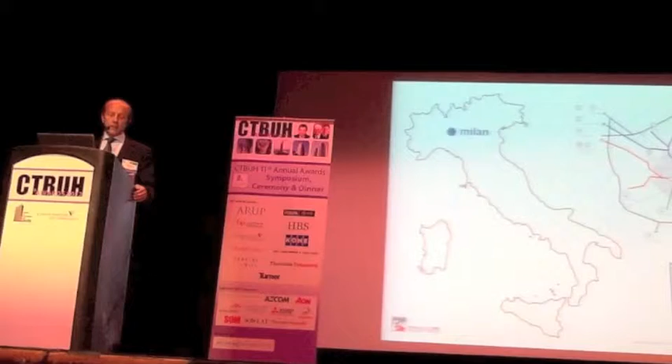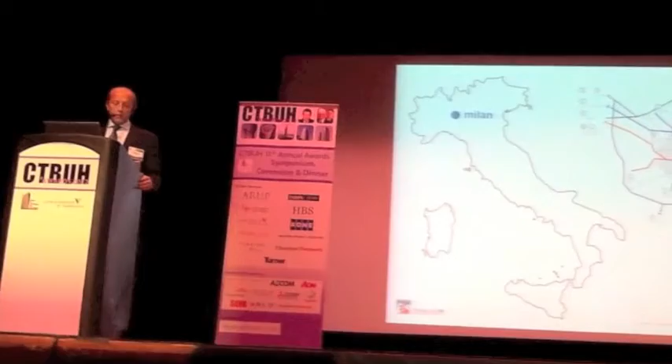The site is in the north part of Milan, heart of an intermodal hub with high accessibility, served not only by the railway network but also by underground lines, metropolitan railways, and several tramways. But these important buildings and the particular system of infrastructure have been a physical fracture in the urban fabric for years.

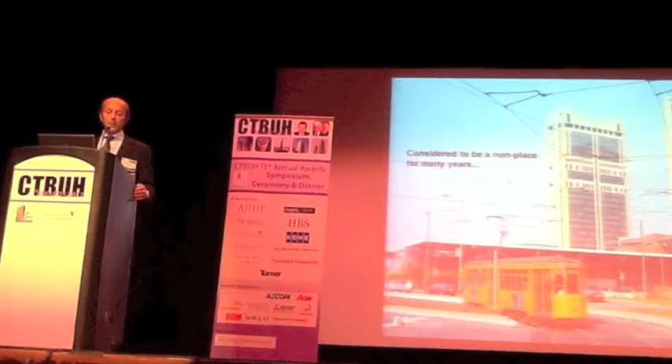Considered to be a 'no man's land', this area of Milan, between Garibaldi and Repubblica, has separated 3 neighborhoods for over 30 years. So when Beni Stabili, our client, decided to buy Garibaldi's Tower in 2004, so many years ago, they wanted to create a complete sustainable restyling of the building.

Aldo Mazzocco, the general manager of Beni Stabili, called me to lead the project, and he said, 'Massimo, I have a dream. I want to offer Milan a gift, a precious gift. I want to leave a mark to improve the skyline of Milan, since we design and build buildings that are people-friendly.'

So I asked him, 'You want to design the first green building in Milan?' And he said, 'Yes, we must do that.'

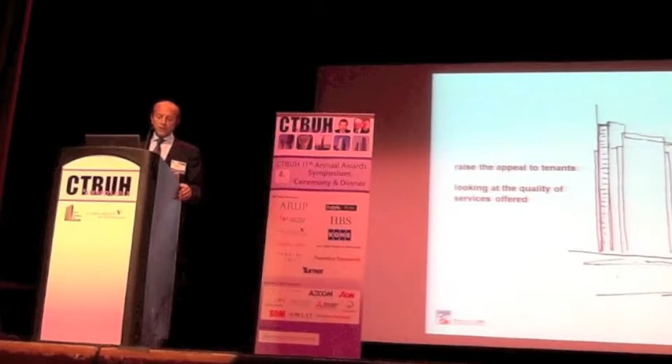Mazzocco, talking about the Garibaldi Tower, said it was necessary to provide a high level of services that would allow us to achieve a double target: to raise the appeal to tenants and to increase property values - a building able to meet their needs, always looking at the quality of services offered to users.

So it was necessary to rethink the building complex through new technological advanced materials and techniques, introducing efficient, flexible, and operationally economical spaces. These actions would propel the towers upward, creating a new symbol for the city - the first one from a green point of view.

The complex is composed of different elements: 2 towers, 22,000 square meters of gross area each.

The design process took about 1 year, from 2007 up to 2008. We developed it inside our company - we are an integrated company, with not only architects, but also engineers and experts on different items. The building development took about 2 years, from 2008 up to 2010.

We call them skyscrapers, but really tall buildings, high-rise buildings - 100 meters to the last operating floor, and then the tip is 122 meters. We can host about 1,200 workstations with people working there.

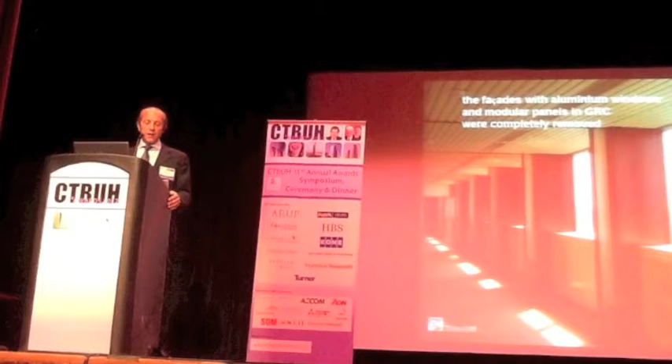The construction operation had been rather delicate because it was an existing complex built on the railways. Internally, it was necessary to dismantle and disassemble all the plants, while the facade with aluminium windows and modular panels in glass fiber reinforced concrete (GRC) were completely removed.

For this reason, dismantlement and disposal required about 120 days, with an average of about 100 workers on site per day. The urban area was very busy and congested by the presence of different sites throughout the Garibaldi area, where there was and still is an intersection of rail, vehicular, and pedestrian flows.

So it was necessary to have accurate and early planning of internal logistics. The building was also completely empty. The only part preserved was the structural framework, made of steel beams and pillars, and a composite slab in corrugated steel and concrete, connected to the inner core of stairwells and elevators.

The complete removal of facades with a building shell of high performance led to a considerable increase in the overall weight of the tower, and in particular of the elevation. So it was necessary to design a structural reinforcement of the basis pillars and all the plants.

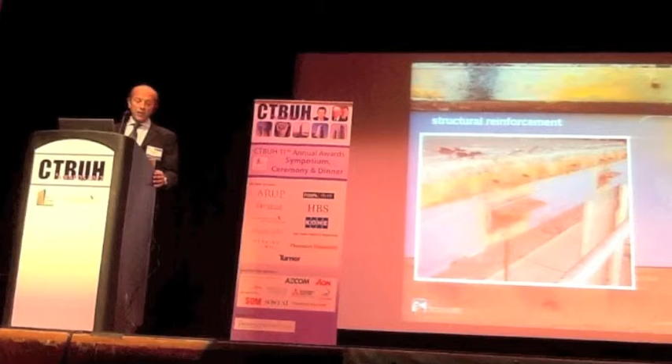The entire complex was upgraded in stages involving three different buildings, starting from Tower B, completed in 2010, continuing with Tower A, just finished, and concluding with Volume C, the new construction being completed in a few months.

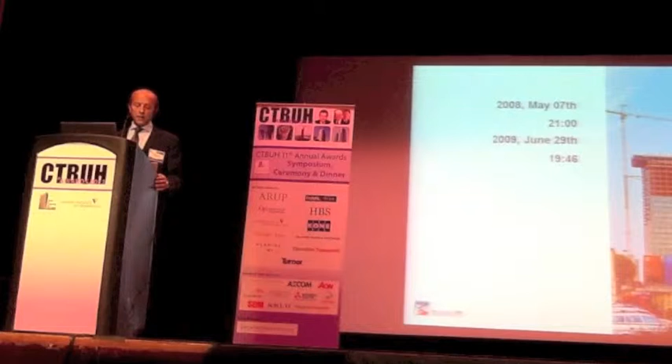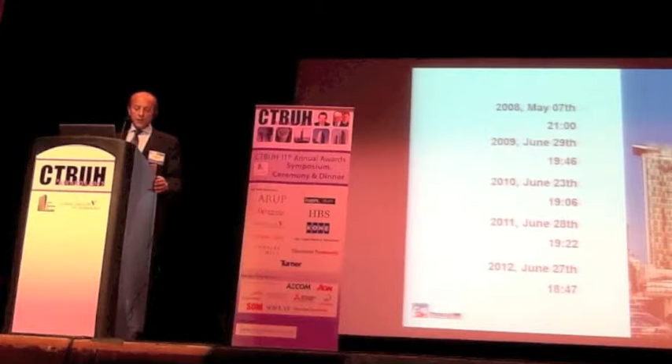From the architectural standpoint, the restyling is totally different from the original, while guaranteeing very technological performance, as it is capable of mitigating outdoor climate conditions and reducing the thermal change of the building's equipment. The restyling features a very important technical and environmentally friendly solution.

I would like to start talking about the main facades, which characterize Tower B from different points of view. These facades were designed as the facets of a diamond that create a different light effect by combining technological innovation, energy efficiency, and architectural aesthetics.

The interactive cells of the principal elevation shimmer like jewels because of the light effects created at the 4 angles of slope, transforming these cells into dynamic elements. As for the client's dream, a precious gift, the precious stone, like a diamond.

This unusual and innovative facade, designed in a team with Permasteelisa, the most important facade supplier, was created using a system based on independent and interactive cells, comprising layered external glazing and a ventilated cavity on the internal flap, with the entire inner window able to be opened only for inspections.

The rectangular cells include a load-bearing structure made of thermally cut aluminum profiling, supporting a variable cross-section external frame that guarantees the transparent facets. So each cell has a 4-degree inclination for the outer glass of the frame, which closes the internal flap.

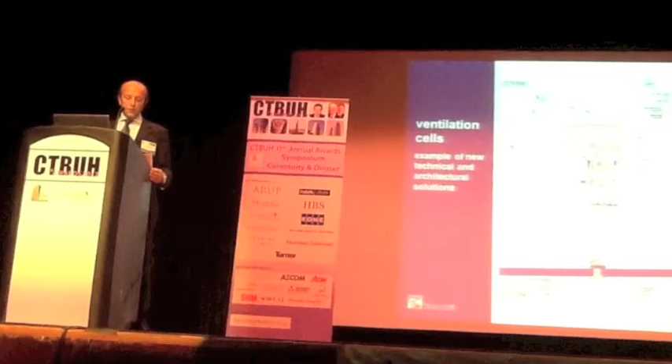The interactive facade is made of precast designed elements, installed with simple joints and fixed in place from the inside without scaffolding. So the interactive ventilation cells that make up this facade are an example of a new technical and architectural solution, capable of using cost-free sunlight to heat the building's interiors whenever necessary, while the ventilation features avoid overheating.

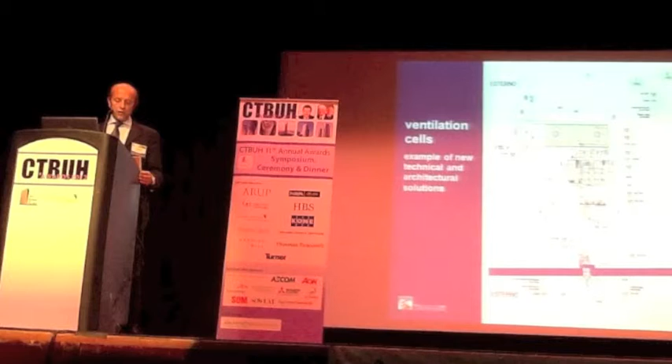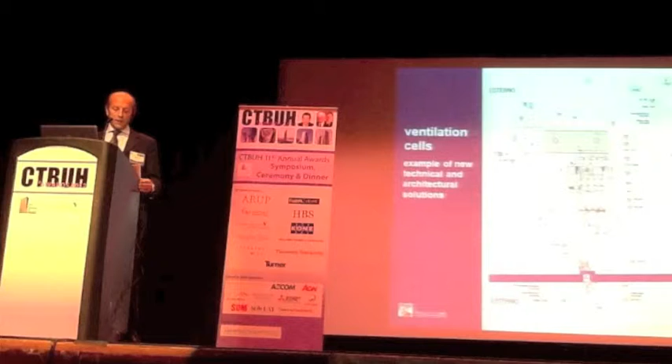Two ventilators are installed at the top of each cell. In summer, these assist the convection currents working in the cavity and facilitate the expulsion of excess hot air.

So, forgive my English, it's not my mother tongue, so I have some trouble.

The two short building sites include the screening, glazing, and bioclimatic conservatories, as well as part of the cladding with blank panels made of natural stone. On every floor along the southwestern facade, we introduced bioclimatic greenhouses, a natural ventilation system that acts as a thermal cushion, creating cooling in summer and cumulative heat in winter, resulting in reduced energy consumption.

This technology actually represents a modern application of an ancient concept, the thermal mass, which has been known and applied since the ancient Roman period.

For air conditioning, we designed a system that uses geothermal sources to produce energy, namely a heat pump that utilizes ground well water. It was necessary to build 4 heating wells and 4 yield wells, requiring holes of 65 meters depth, placed in one of the few areas available north of the building. Through this system, the entire complex has no local CO2 emissions.

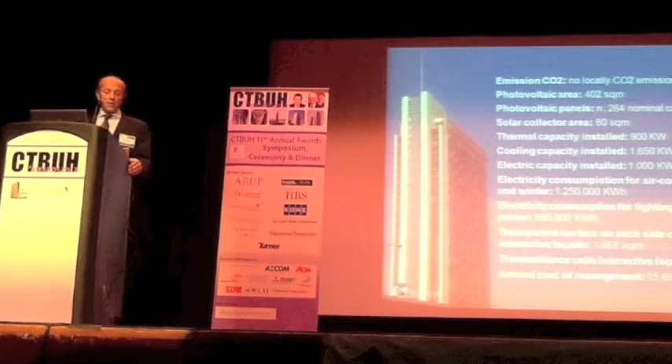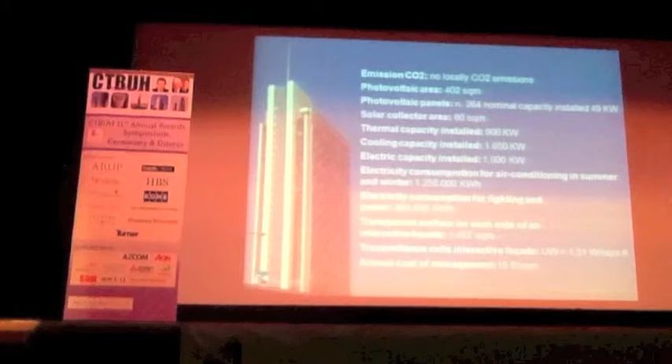Here you can see some of the technical characteristics of this building: no CO2 emissions, and about 260 photovoltaic panels. Most importantly, the annual management cost of this building is less than 15 euros per square meter. The previous one was more than 100 euros per square meter.

The mission we had to achieve was not easy, but I think we succeeded. We transformed a technologically obsolete and outdated building of the 80s into a new sustainable building, within a total redevelopment of the area, linking together the Porta Nuova area and the Isola district, providing a driving force for an important regeneration of this part of Milan.

Milan in recent years has been a city of rebuilding, transformation, and urban redevelopment, aiming to create a more modern and sustainable city of the future. Thanks.

We believe that integrated design, teamwork, a sustainable approach, proper compliance with the users' needs, and respect for environmental resources are the way that contemporary architecture must take to be sustainable and head towards the future.

For this reason, thinking of Milan's new forward-looking spirit, the entire complex of Garibaldi Business Center is one of the most important examples of applying teamwork to obtain good results. A team composed not only of architects and engineers, but also the developer, the investor, the municipality, and also the final user, who is the most important part of the process.

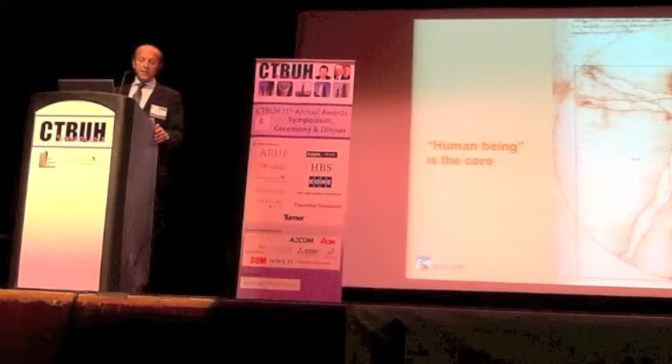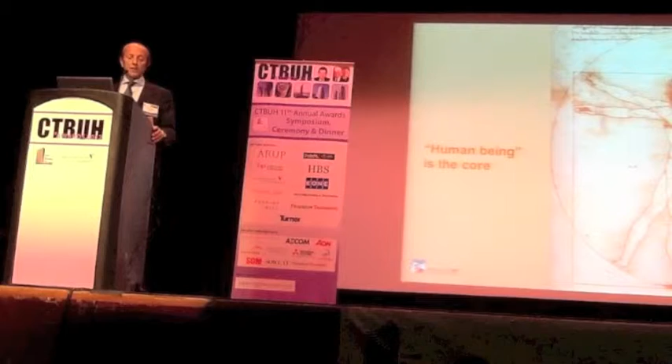My design principle is to place man, the final user, at the center of our architectural process, developing solutions that are not only aesthetically pleasing, but also functional and above all sustainable, in order to satisfy the real users' needs. Thanks to our design approach from inside going out, and the creation of a new layout plan that's more flexible, functional, and efficient, Maire Tecnimont decided to rent the entire complex, and for this reason, Progetto CMR also designed the workspaces.

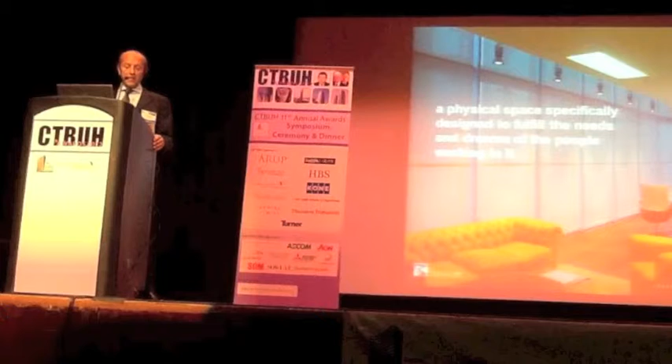The design of the office habitat affects the life and activity of workers. If the work environment is seen as a conflicting artifact, productivity will suffer. It is necessary to invest in relation-friendly design and transform physical space into something specifically designed to fulfill the needs and dreams of the people working in it.

Some simple lines to explain the project: we use movable glass partitions, efficient and functional furnishing, new light fittings, strengthening the quality of the new workplaces. Space diversification with open areas, enclosed offices, private rooms, informal spaces for meetings and for relaxing, etc., are the result of this cooperation.

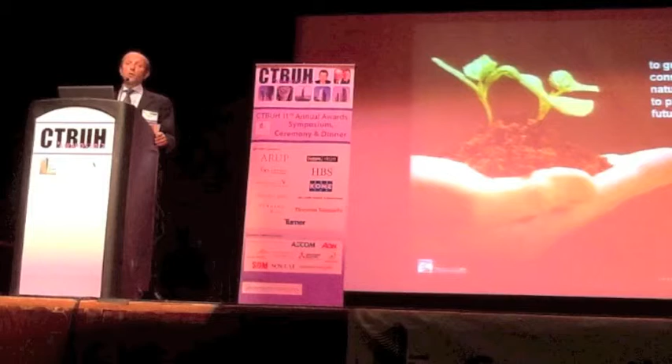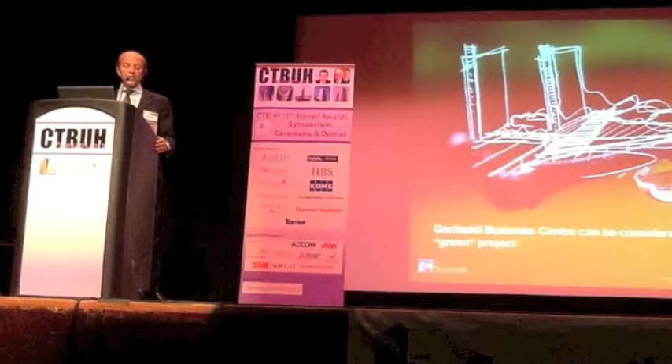Environmental sustainability has been defined as the ability to guarantee reduced consumption of limited natural resources, with a view to preserving them for future generations. Through the use of innovative technologies that utilize sun, water, air, and wind for energy production, Garibaldi Business Center achieved the goal of reducing energy consumption and pollution, and therefore can be considered a valuable green project, the first of its kind in Italy.

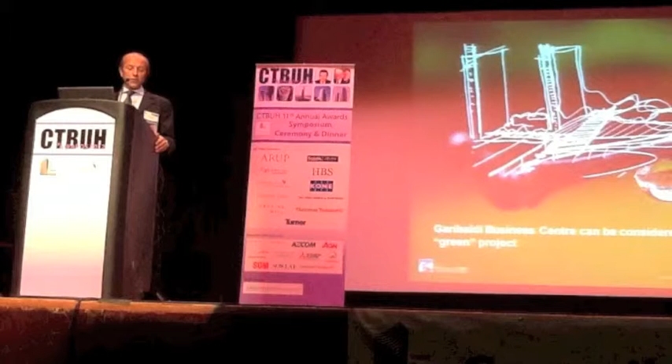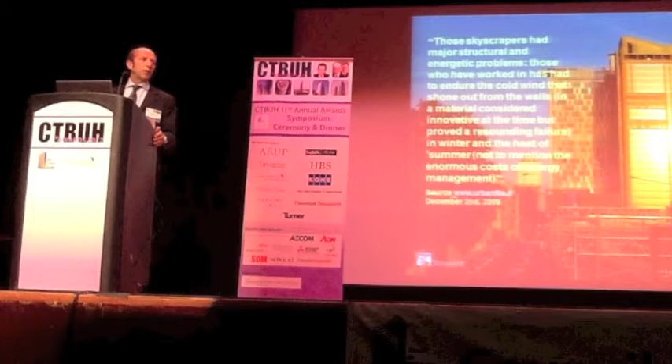Finally, we collected some comments on the internet. You can find a lot of comments - more than 3,000 pictures about this project, where common people explain their ideas on the building and their suggestions, especially the people that worked inside the building for a long time, who had terrible memories about the situation inside. I think it's interesting to have this aspect too.

The last one was interesting. People wrote: 'When the sky is overcast, you can see the special effect of the light. On a sunny day, it will be an even more impressive effect.'

We are very proud that we succeeded in realizing the dream of Mr. Mazzocco, because after all, in the words of Thomas Edison, the value of an idea lies in putting it into practice. So now let me introduce our client, Gianni Bardassi, Vice President of Strategic Marketing and Communication.